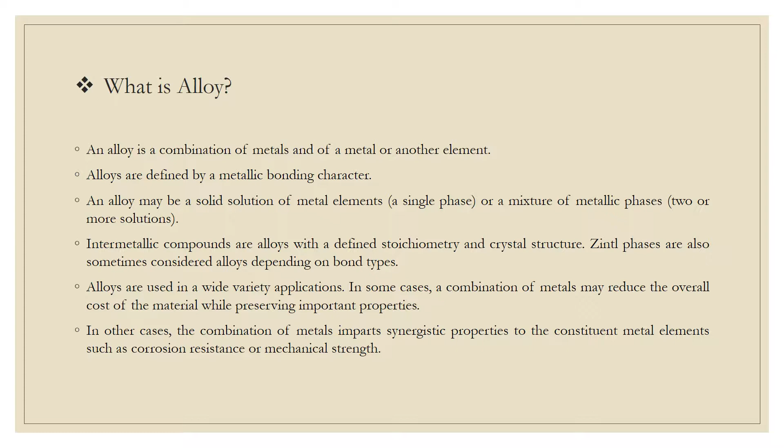Here are examples of alloys: solder, steel, brass, pewter, duralumin, and bronze.

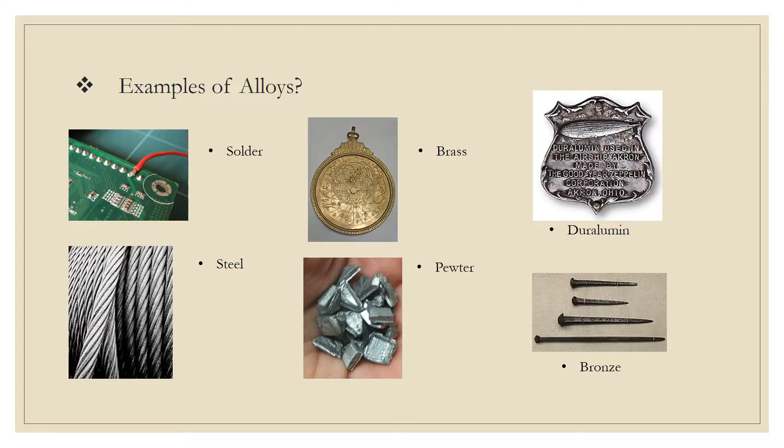Next, what is magnesium? Magnesium alloys are mixtures of magnesium with other metals, often aluminum, zinc, manganese, silicon, copper, rare earths, and zirconium.

Magnesium is the lightest structural metal. Magnesium alloys have a hexagonal lattice structure, which affects the fundamental properties of these alloys. Plastic deformation of the hexagonal lattice is more complicated than in cubic-latticed metals like aluminum, copper, and steel.

Therefore, magnesium alloys are typically used as cast alloys. Cast magnesium alloys are used for many components of modern automobiles, and have been used in some high-performance vehicles. Die-cast magnesium is also used for camera bodies and components in lenses.

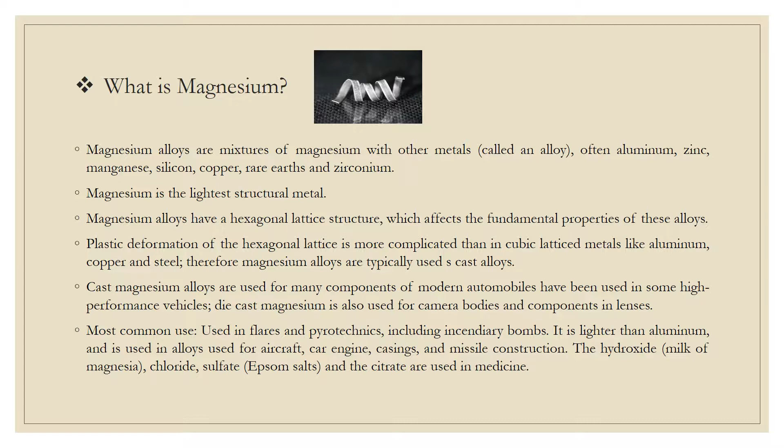Most commonly used in flares and pyrotechnics, including incendiary bombs. It is lighter than aluminum and is used in alloys for aircraft, car engine casings, and missile construction. The hydroxide milk of magnesia, chloride, sulfate, Epsom salts, and the citrate are used in medicine.

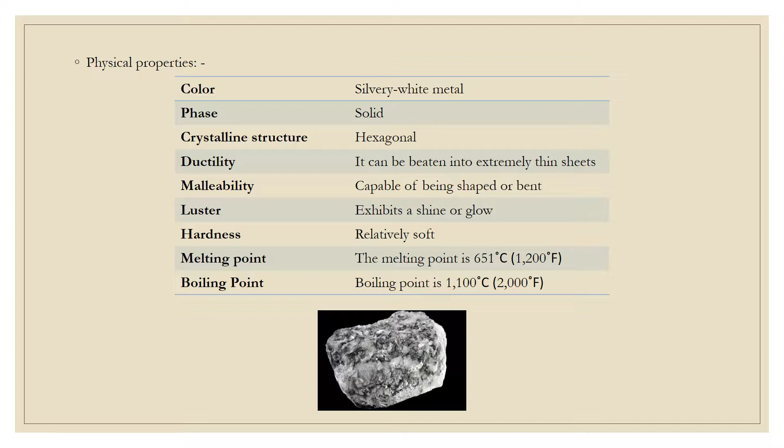This is the physical properties for magnesium alloy. And here are the chemical properties and the mechanical properties of magnesium alloy.

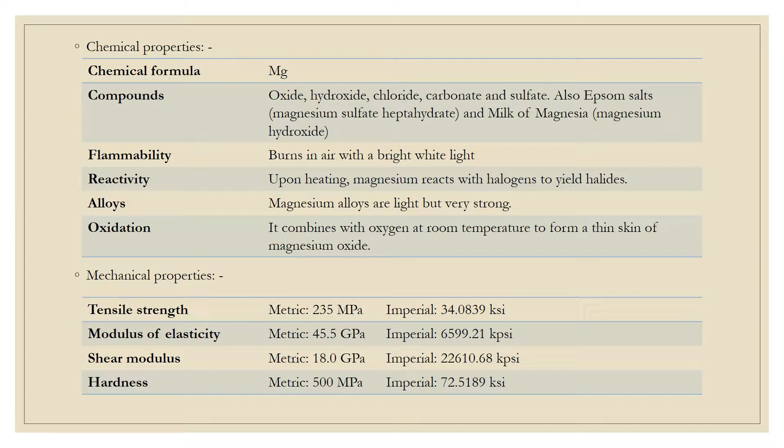The application areas of magnesium: ladder, engine block, luggage, chainsaw, bicycle, laptop.

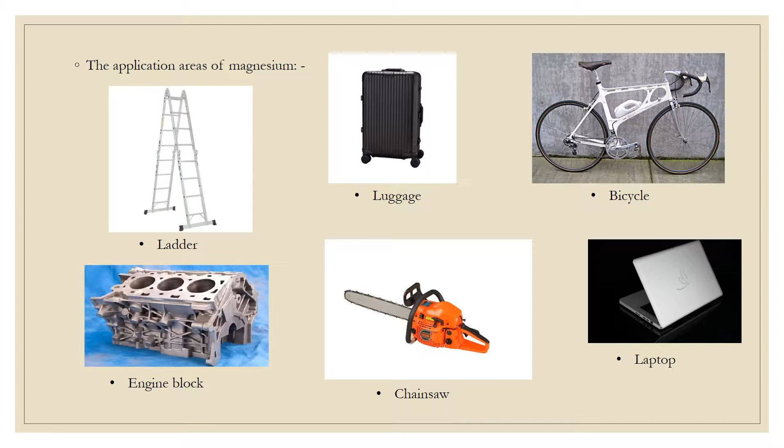What is tandem, or tin? Tin is a silvery white metal that characteristically has a faint yellow hue due to slight oxidation. Tin, like indium, is soft enough to be cut without much force. When a bar of tin is bent, the so-called tin cry can be heard as a result of sliding tin crystals reforming. This trait is shared by indium, cadmium, and frozen mercury.

Pure tin, after solidifying, keeps a mirror-like appearance similar to most tin alloys such as pewter. The metal solidifies with a dull gray color. Tin is a post-transition metal in group 14 of the periodic table of elements.

Tin is a soft, silvery white metal with a bluish tinge, known to the ancients in bronze, an alloy with copper. It is widely used for plating steel cans used as food containers, in metals used for bearings, and in solder. Tin is non-toxic, ductile, malleable, and adapted to all kinds of cold working such as rolling, spinning, and extrusion.

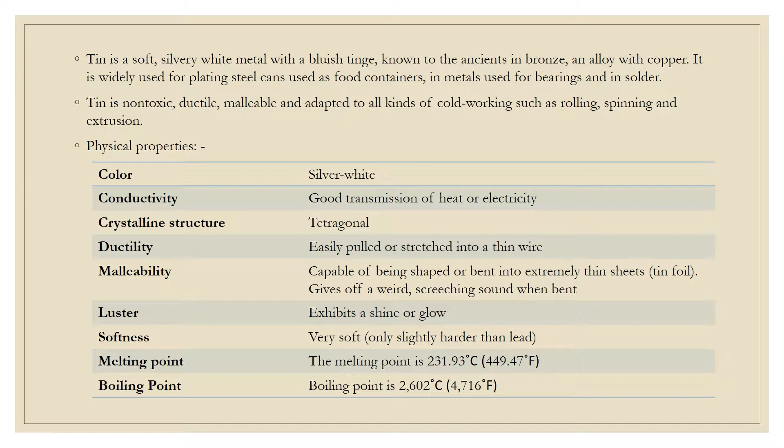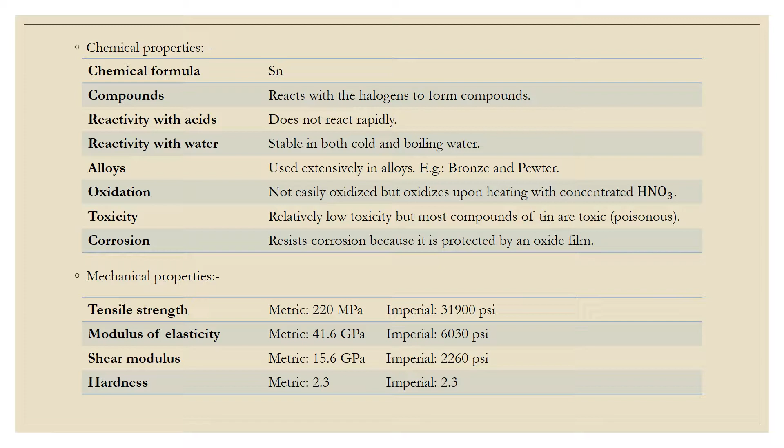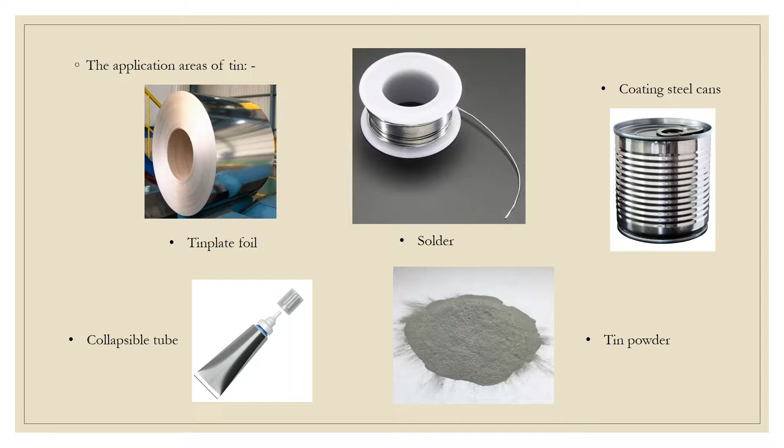And now I'm going to explain to you what magnesium-stannum alloy is. Magnesium alloys are widely used in automobiles due to their advantages such as low density, high strength-to-weight ratio, high specific toughness, and being environmentally friendly. The established trend in weight reduction of magnesium alloys would also find a way to powertrain applications.

For some critical industrial applications, such as transmission housings and crankcases, with elevated temperatures of 150 degrees and above, mechanical properties and creep resistance of alloys are of paramount consideration for researchers.

It is reported that AZ91 alloy delivers poor high-temperature properties. The major reason for poor creep strength of AZ91 alloys is microstructural degradation that takes place at elevated temperature. As far as AZ91 alloy is concerned, the principal room temperature strengthening element is Mg17Al12 intermetallic.

By virtue of the low melting point of this intermetallic, which is 437 degrees Celsius, and higher diffusivity in the magnesium matrix, these coarsen at a faster rate and become unstable at higher temperatures above 120 degrees Celsius, and no longer act as a barrier for dislocation movement.

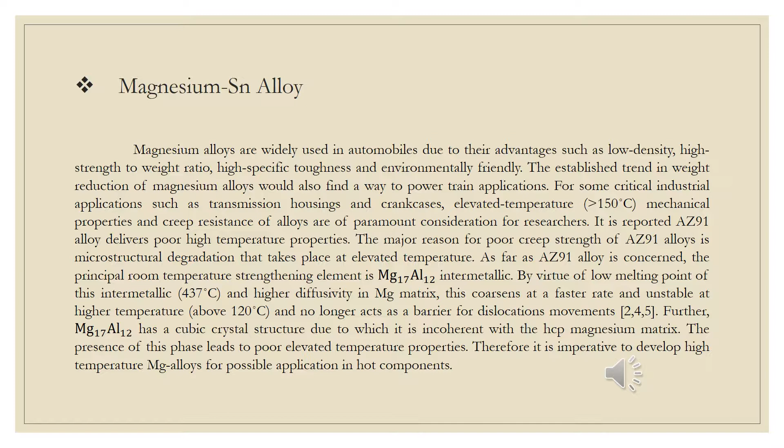Therefore, it is imperative to develop high-temperature magnesium alloys for possible application in hot components. Among the magnesium-based alloys, magnesium-stannum-based alloys have attracted considerable interest for their potential application at elevated temperatures.

The intermetallic magnesium-2-stannum phase has a higher melting point, 770 degrees Celsius, than that of the magnesium-17-aluminum-12 phase.

The magnesium 8% alloy contains magnesium-2-stannum intermetallic phase, and magnesium 8% stannum 3% aluminum 1% alloy contains both magnesium-2-stannum and magnesium-2-silicon phases, where the melting point is 1102 degrees Celsius.

Magnesium-stannum-based alloys are therefore likely to be more creep resistant at elevated temperatures than magnesium-aluminum-based alloys. Researchers have studied the compressive creep behavior of magnesium-stannum alloys. In this case, an attempt has been made to investigate the magnesium-stannum alloy.

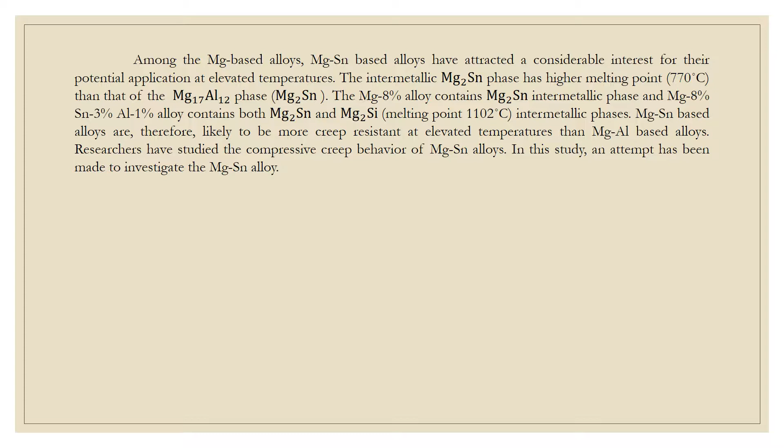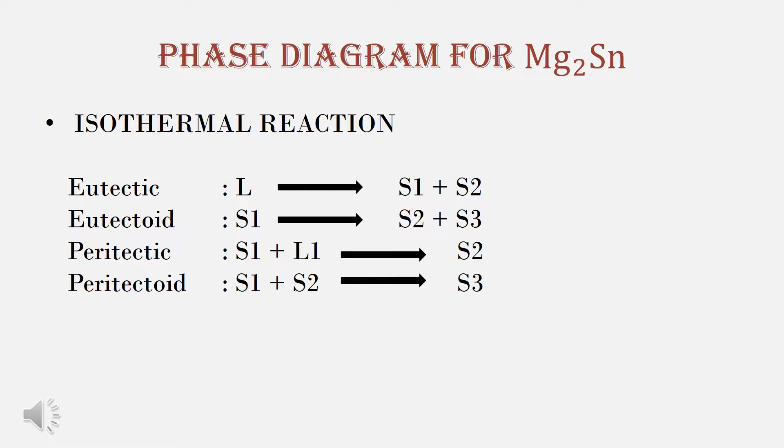There are four types of isothermal reaction for phase diagram, which are eutectic, eutectoid, peritectic, and peritectoid. The example of isothermal reaction that we can get from the phase diagram of magnesium-stannum is eutectic reaction.

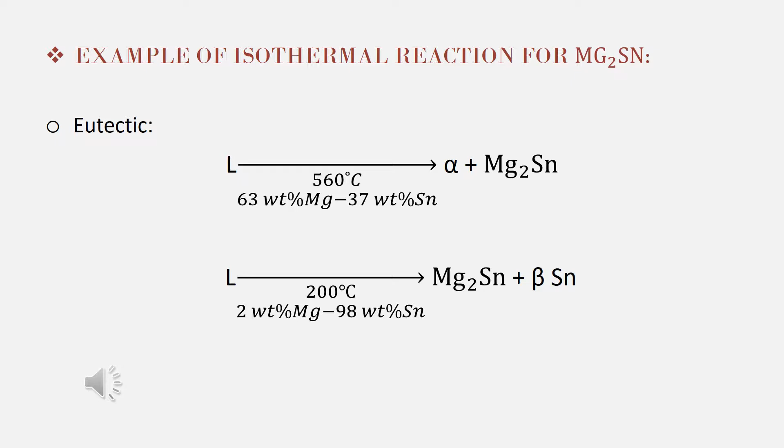For example, liquid undergoes eutectic reaction at 560 degrees at the composition of 63 weight percent magnesium and 37 weight percent stannum to produce alpha plus Mg2Sn. For another example, liquid undergoes eutectic reaction at 200 degrees with the composition of 2 weight percent magnesium and 98 weight percent stannum to produce Mg2Sn plus beta Sn.

Intermetallic compound is a complex structure in which solute atoms are present among solvents in certain specific proportions, which contains two or more metallic elements to produce a new phase with its own composition, crystal structure, and properties. It is almost always very hard and brittle.

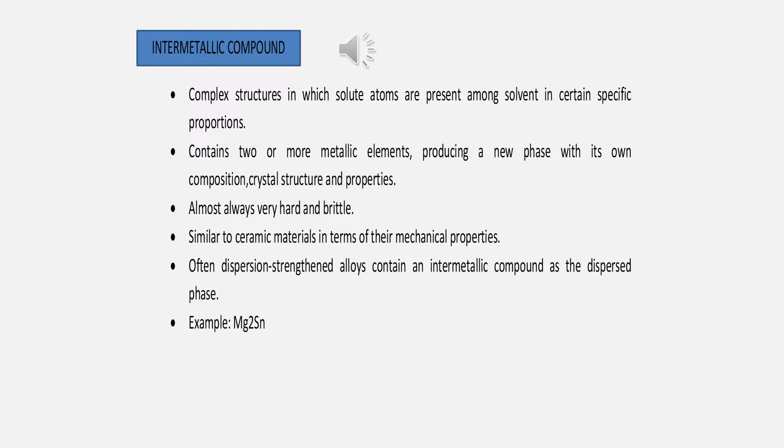Intermetallic compounds are similar to ceramic materials in terms of their mechanical properties. Dispersion strengthened alloys often contain an intermetallic compound as the dispersed phase, for example, Mg2Sn. For the phase diagram of magnesium-stannum, the red line indicates the intermetallic compound, which is Mg2Sn, which you can see here.

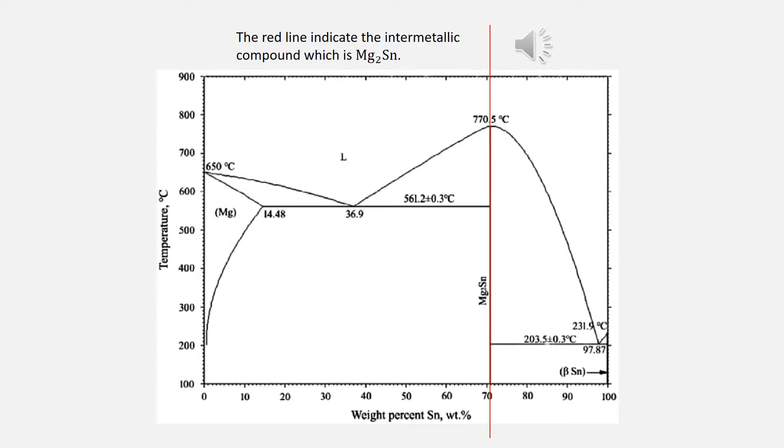Solid solution is formed as a result of adding impurity atoms to a metal. Solid solution is an alloy in which an element is dissolved in another to form a single phase structure without changing the crystal structure, and no new structures are formed. Solid solution is made of two parts, which are solvent and solute.

Solute is the minor part of the solution, which is the dissolved impurity. Dissolved element or solute atoms are an element or compound present in minor concentration. It can be either metallic or non-metallic. For solvent, it is the major part which dissolves the solute. Solvent is the base element or host atoms, element or compound present in the greatest amount, and it is metallic.

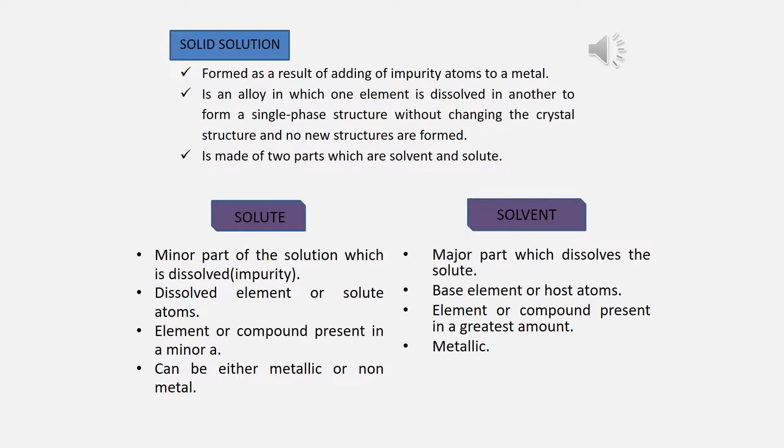There are two types of solid solution, which are substitutional solid solution and interstitial solid solution. Solute or impurity atoms replace or substitute the solvent atoms for substitutional solid solution. Solute atoms can substitute in the crystal lattice, and the crystal lattice of the parent element or solvent is unchanged, but it may be distorted.

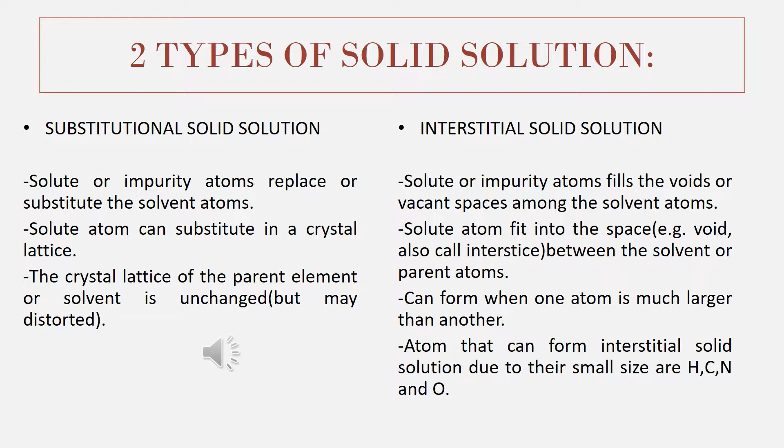For interstitial solid solution, solute or impurity atoms fill the voids or vacant spaces among the solvent atoms. Solute atoms fit into the space, for example the void, also called interstice, between the solvent or parent atoms. It can form when one atom is much larger than another. Atoms that can form interstitial solid solution due to their small size are hydrogen, carbon, nitrogen, and oxygen.

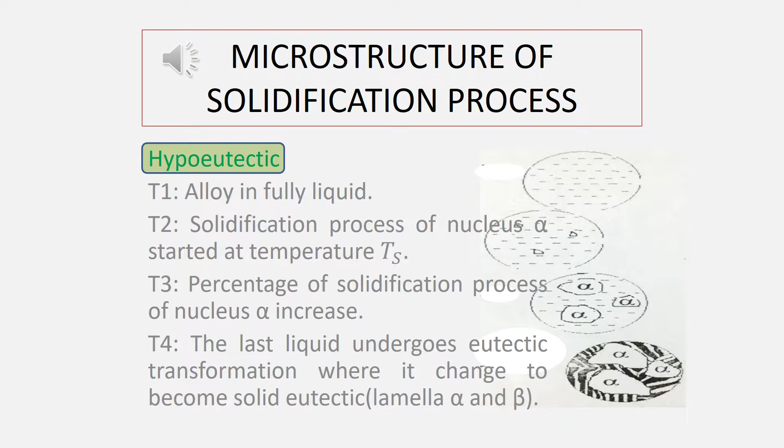This is the microstructure of the solidification process. For hypoeutectic, T1: alloy is fully liquid. T2: solidification process of nucleus alpha started at temperature Ts. T3: percentage of solidification process of nucleus alpha increases. T4: the last liquid undergoes eutectic transformation, where it changes to become solid eutectic, lamella alpha and beta.

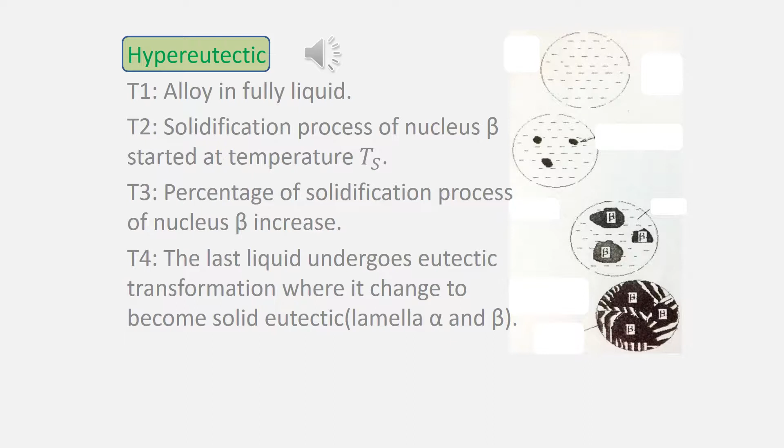For hypereutectic, T1: alloy is fully liquid. T2: solidification process of nucleus beta started at temperature Ts. T3: percentage of solidification process of nucleus beta increases. T4: the last liquid undergoes eutectic transformation, where it changes to become solid eutectic, lamella alpha and beta.

For eutectic, at the eutectic temperature Te, the alloy undergoes the process of eutectic transformation, as you can see in the figure below.

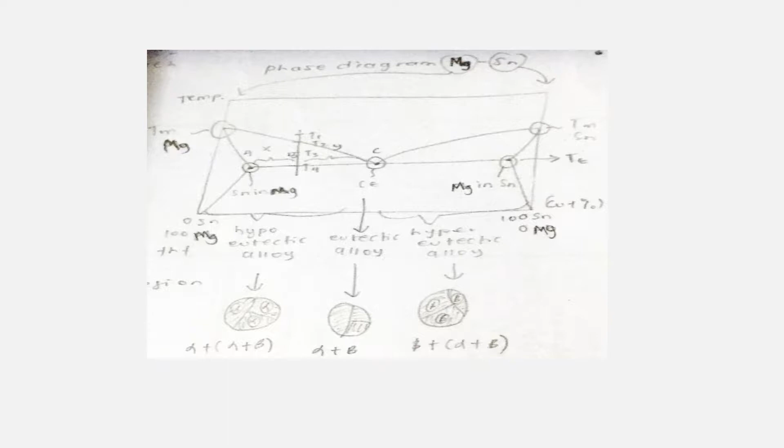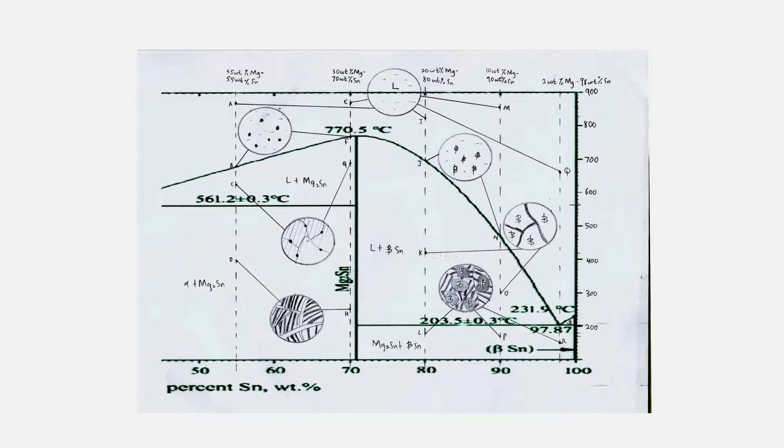At point A, the temperature is 870 and its composition is 55% stannum and its phase is liquid. At point B, the temperature is 670 degrees. At point C, the temperature is 620 degrees. At point D, 400 degrees.

For points B, C, D, the composition is 45% magnesium and 55% stannum. For points B and C, the phase is liquid plus Mg2Sn, but for point D, the phase is alpha plus Mg2Sn. For point E, the temperature is 870 degrees.

The composition for F, G, H is 30 weight percent magnesium and 70 weight percent stannum. For points F and G, the phase is liquid plus Mg2Sn, but for point H, the phase is alpha plus Mg2Sn.

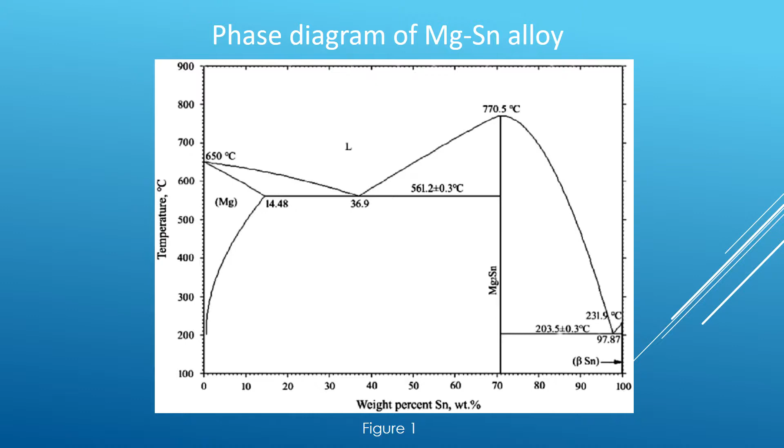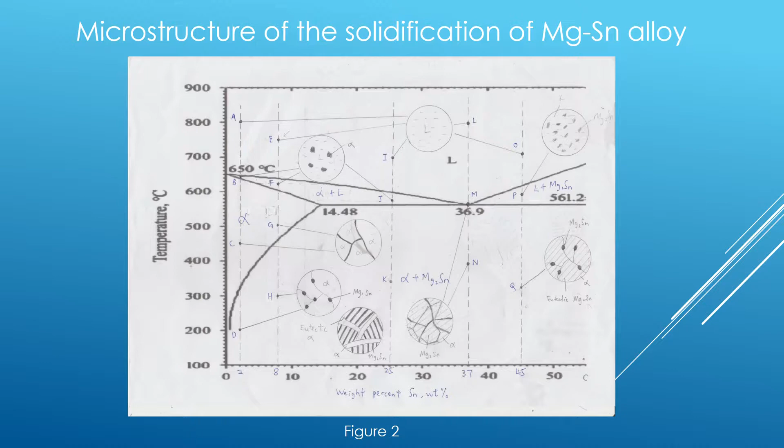Now I am going to discuss the details of each microstructure with different weight percent of tin.

Points A, B, C, and D are located at the line of 2 weight percent tin. At point A, the microstructure is in liquid phase at 800 degrees Celsius with composition of liquid equal to 2 weight percent tin. At point B, the microstructure is alpha plus liquid phase at 645 degrees Celsius, with composition of alpha equal to 1.5 weight percent tin and composition of liquid equal to 5 weight percent tin.

At point C, the microstructure is in alpha phase at 450 degrees Celsius with composition of 2 weight percent tin. At point D, the microstructure is alpha plus magnesium tin alloy phase, at temperature of 200 degrees Celsius, with composition of alpha equal to 0.5 weight percent tin and composition of magnesium tin equal to 71 weight percent tin.

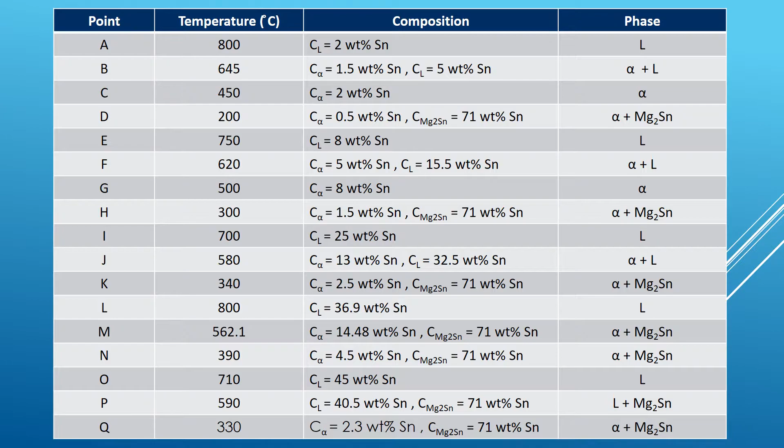A method to improve material properties for magnesium-tin alloy is the equal channel angular extrusion process, to improve wear behavior and microstructure of magnesium-tin alloy. Let me explain details about this method.

This method investigates the wear behavior of magnesium 5% tin alloys, focusing on the alloy processed by equal channel angular extrusion (ECAE). ECAE, which is equal channel angular extrusion, is a technology used to refine grain size and therefore improve the mechanical properties of metals and alloys.

The influence of the ECAE process on the wear properties of magnesium-tin alloys and the wear mechanism of this alloy during sliding were explored. The relation between the microstructure of the ECAE alloy and the mechanical properties of the alloys was examined.

In this process, it will investigate the ECAE-processed microstructure of magnesium-tin alloy by scanning electron microscope and X-ray diffraction. These two methods are used in order to improve wear behavior and microstructure of magnesium-tin alloy.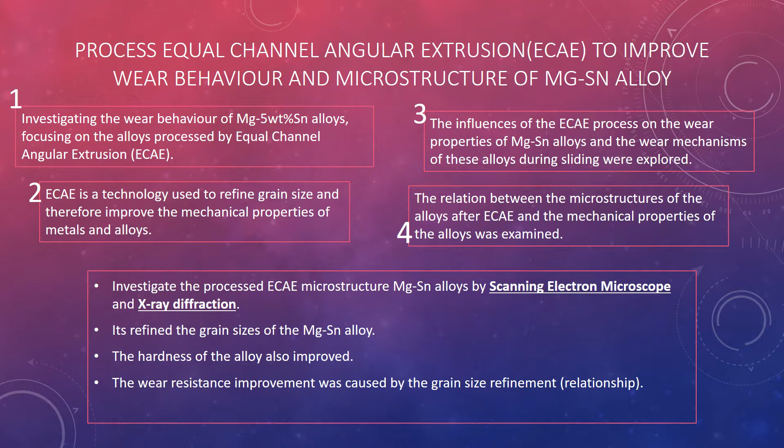These two processes each refine the grain size of the magnesium-tin alloy. The hardness of the alloy also improved, and the relationship between these two is that the wear resistance improvement is caused by the grain size refinement. Based on this experiment, there is a procedure to use this method, which is equal channel angular extrusion.

Firstly, the magnesium 5% tin alloy was produced using the ingot casting method. Secondly, the pure magnesium and the pure tin were placed in a stainless steel crucible and melted in protective gas, which is SF6. After that, the pure magnesium and pure tin were superheated to 800 degrees, and then at 720 degrees poured into a die steel mold. There is a specific dimension for this mold that I haven't mentioned, and I will put it in the reference.

Fourth step, the ECAE process. As-cast magnesium-tin alloy specimens were machined into billets via electrical discharge machining and then heated in the die for 20 minutes before the extrusion process. Next, the specimens were extruded at a sharp 120 degree angle, where the die for ECAE was preheated to 300 degrees Celsius.

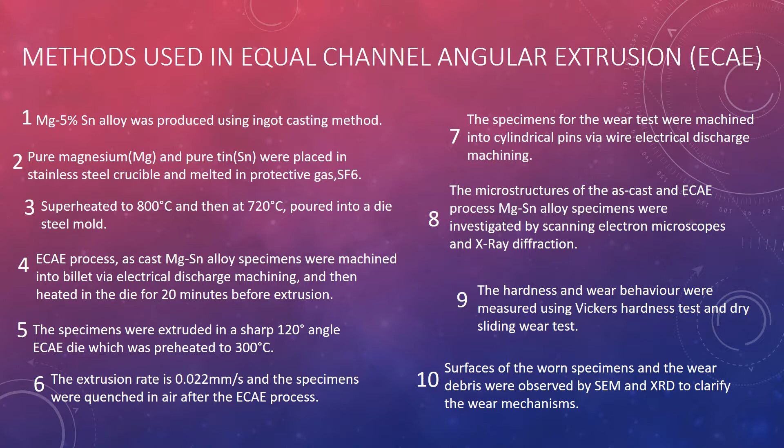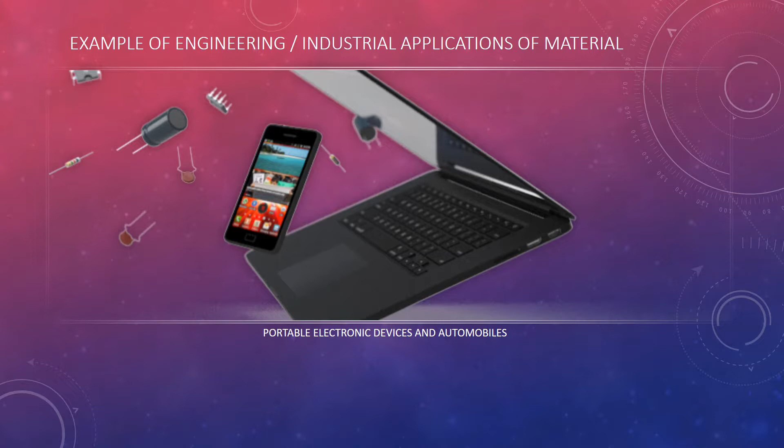There are some examples of engineering industrial applications for magnesium-tin alloy. For example, portable electronic devices. It is widely used in our daily life, like our laptop, our smartphone, remote control, and other mobile devices. And also for automobile use in industry. Okay, thank you.

Materials preparation and microstructure characterization. An alloy with a nominal composition of magnesium-tin in weight percent was prepared in an electric furnace under protective atmospheres of carbon dioxide and sulfur hexafluoride. The homogenization of the cast alloy was carried out through a multi-step heating process. Firstly, hold at 300 degrees Celsius for 4 hours, then 420 degrees Celsius for 24 hours, and finally solution treated at 460 degrees Celsius for 2 hours, followed by quenching into water.

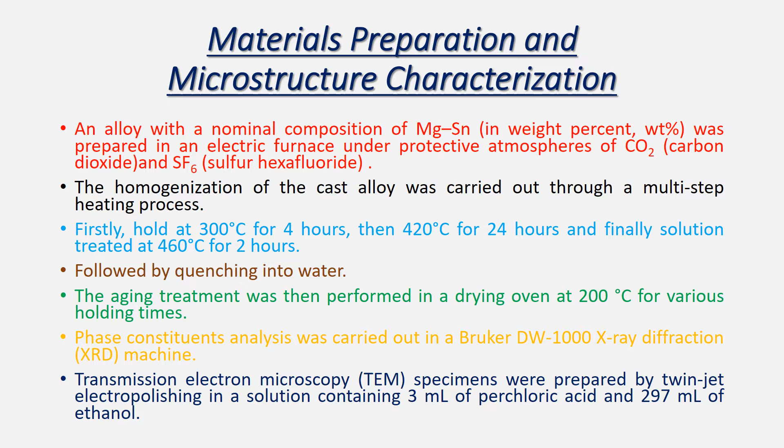The aging treatment was then performed in the drying oven at 200 degrees Celsius for various holding times. Phase constituent analysis was carried out in a Bruker DW-1000 X-ray diffraction machine. Transmission electron microscopy specimens were prepared by twin jet electropolishing in a solution containing 3 ml of perchloric acid and 297 ml of ethanol.

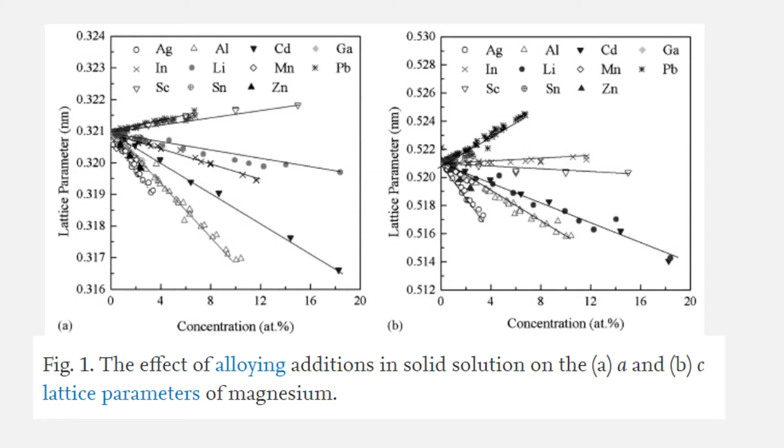This is Figure 1. Figure 1 shows the effect of alloying additions in solid solution on the a and c lattice parameters of magnesium. Magnesium-tin alloy is a recently developed wrought magnesium alloy. The alloy usually contains nearly equal amounts of tin, an amount of over 4 weight percent. This is much different from typical magnesium alloys.

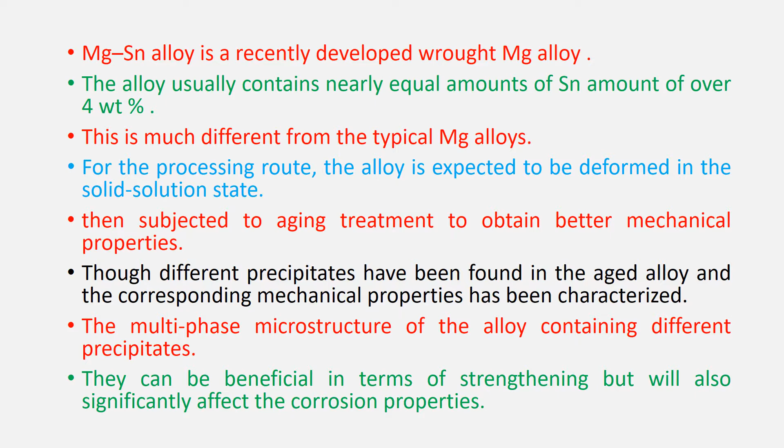For the processing route, the alloy is expected to be deformed in the solid solution state, then subjected to aging treatment to obtain better mechanical properties. Different precipitates have been found in the aged alloy and the corresponding mechanical properties have been characterized. The multi-phase microstructure of the alloy contains different precipitates. They can be beneficial in terms of strengthening but will also significantly affect the corrosion properties.

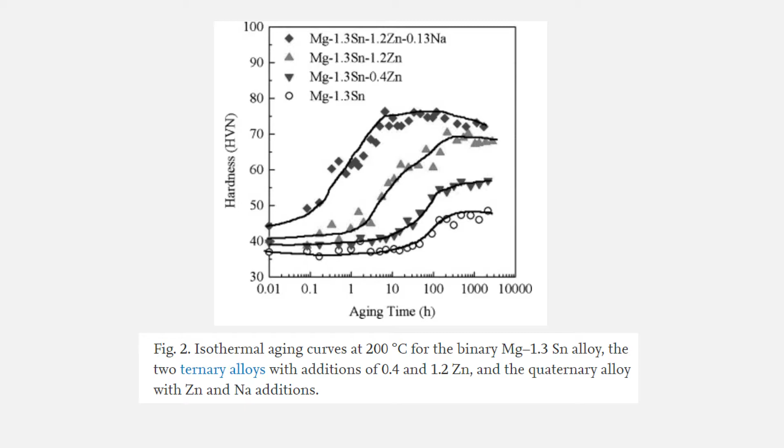This is Figure 2. Figure 2 shows isothermal aging curves at 200 degrees Celsius for the binary Mg-1.3Sn alloy, the two ternary alloys with additions of 0.4 and 1.2 zinc, and the quaternary alloy with zinc and sodium additions. Since the very negative corrosion potential of alpha magnesium, the corrosion of the aged magnesium alloys may be accelerated by the microgalvanic coupling between the anodic alpha magnesium phase and the precipitates.

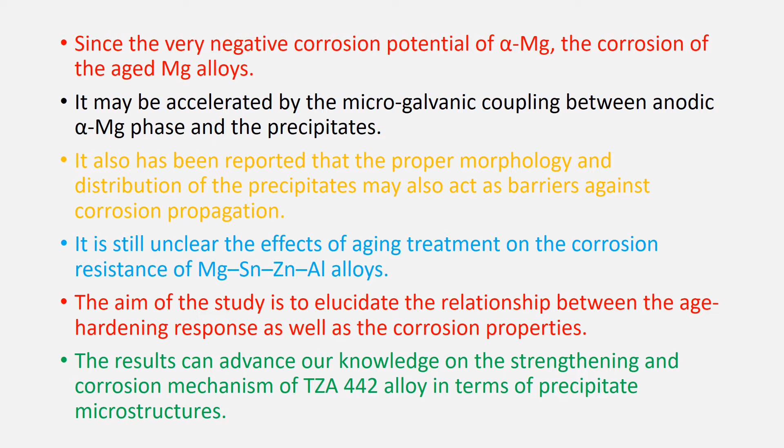It also has been reported that the proper morphology and distribution of the precipitates may also act as barriers against corrosion propagation. It is still unclear what the effects of aging treatment are on the corrosion resistance of magnesium-tin-zinc-aluminum alloys. The aim of the study is to elucidate the relationship between the age hardening response and the corrosion properties. The results can advance our knowledge on the strengthening and corrosion mechanism of TZA442 alloy in terms of precipitate microstructures.

This is Figure 3. Figure 3 illustrates a TEM micrograph of the peak-aged microstructure of the Mg-1.3Sn alloy in the magnesium beam directions. The respective microbeam diffraction patterns from the precipitates are shown in B and D, together with an interpretation of the patterns in C and F, from which the precipitates are identified as Mg2Sn.

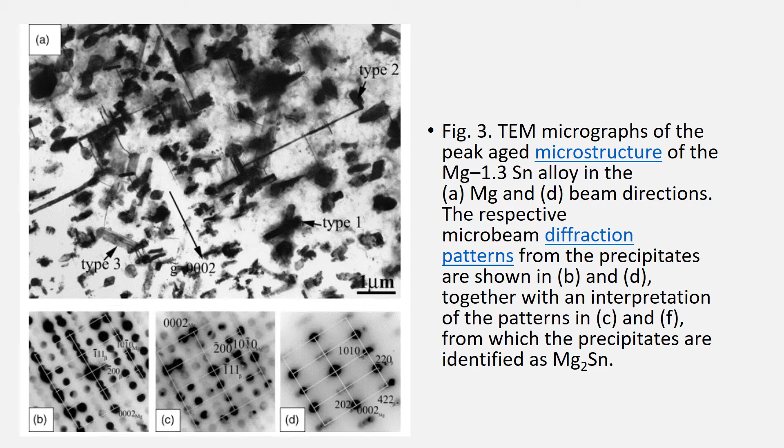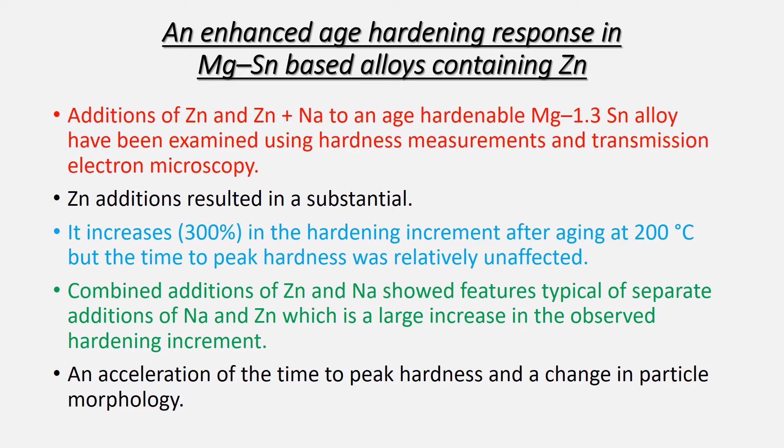An enhanced age hardening response in magnesium-tin based alloys containing zinc. Additions of zinc and zinc plus sodium to an age-hardenable Mg-1.3Sn alloy have been examined using hardness measurements and transmission electron microscopy. Zinc addition resulted in a substantial increase of 300% in hardening increment after aging at 200 degrees Celsius, but the time to peak hardness was relatively unaffected. Combined additions of zinc and sodium show features typical of separate additions of sodium and zinc, which is a large increase in the observed hardening increment, an acceleration of the time to peak hardness, and a change in particle morphology.

Furthermore, the combined zinc plus sodium additions resulted in a synergistic effect on precipitate stability during overaging and the time to peak hardness. The stability of the Mg2Sn precipitate formed in the Mg-Sn-Zn-Na alloy was much greater than those usually observed in the Mg-Sn-Na system, and the time to peak hardness was much reduced from 58 hours in the Mg-Sn-Na alloy to 7 hours in the Mg-Sn-Zn-Na alloy.

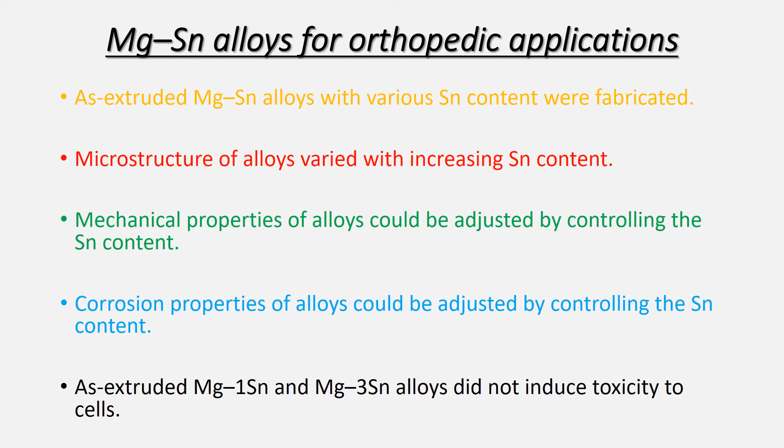Magnesium-tin alloys for orthopedic applications. As-extruded magnesium-tin alloys with various tin content were fabricated. Microstructure of the alloys varies with increasing tin content. Mechanical properties of the alloys could be adjusted by controlling the tin content. Corrosion properties of the alloys could be adjusted by controlling the tin content. As-extruded Mg-1Sn and Mg-3Sn alloys did not induce toxicity to cells.

Materials and methods for orthopedic applications. Magnesium-tin alloy ingots with nominal composition of 1, 3, 5, and 7 weight percent tin were prepared by melting pure magnesium, 99.98 weight percent, and pure tin, 99.9 weight percent, in a middle frequency induction furnace, and quenching the stainless steel crucible with the melt in salt water. The melting process was carried out in a mixed gas atmosphere of sulfur hexafluoride and carbon dioxide to prevent the melt from oxidation.

The ingots were heat treated at 520 degrees Celsius for 24 hours, followed by quenching in water at room temperature. Finally, the heat-treated ingots were preheated at 300 degrees Celsius for 1 hour and extruded into cylindrical rods at that temperature with an extrusion ratio of 25:1.

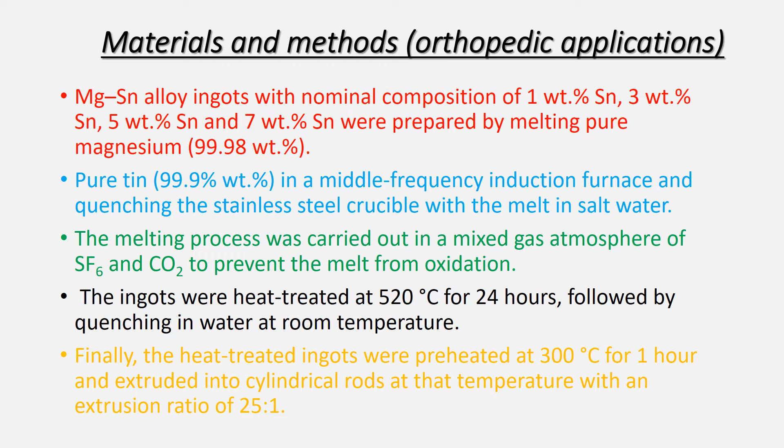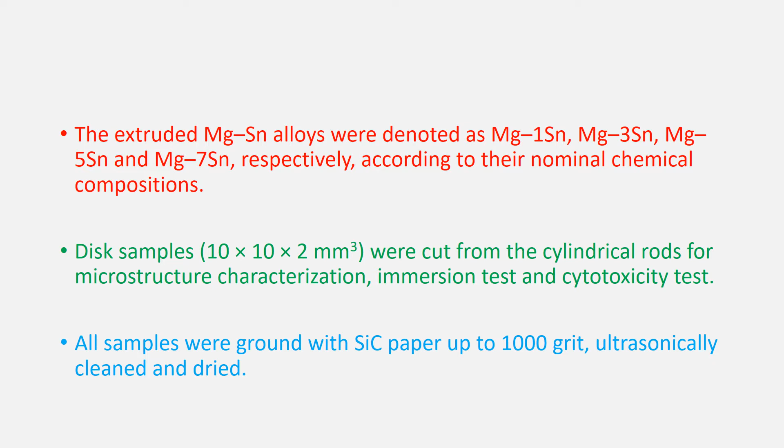The extruded magnesium-tin alloys were denoted as Mg-1Sn, Mg-3Sn, Mg-5Sn, and Mg-7Sn respectively, according to their nominal chemical compositions. Samples of 10 × 10 × 2 cubic millimeters were cut from the cylindrical rods for microstructure characterization, immersion tests, and cytotoxicity tests. All samples were ground with silicon carbide paper up to 1000 grit, ultrasonically cleaned and dried.

This is Figure 4. It illustrates surface morphologies of as-extruded magnesium-tin alloys after immersion in Hank's solution for 500 hours. A shows Mg-1Sn, B shows Mg-3Sn, C shows Mg-5Sn, D shows Mg-7Sn, and E shows EDS analysis corresponding to the A area. The inserted photos are a large view of the local area.